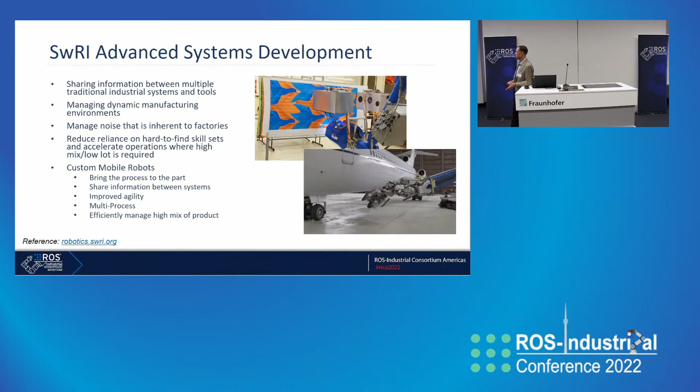So a little bit of background on us. We work a lot in applied R&D across a large spectrum of disciplines in engineering, everything from deep sea to deep space, as we say, which also includes robotics. So in terms of the types of robotic systems that we work on, we're really focused on trying to deploy robotic systems in places where traditionally it's been really difficult. So for us, this is primarily trying to work in dynamic manufacturing environments where we can't fixture parts or parts don't come out the same way every time.

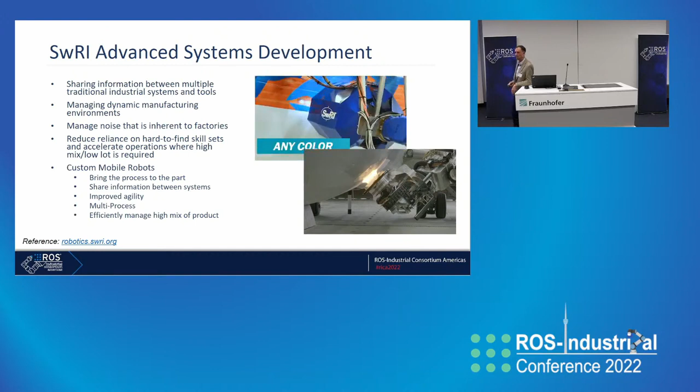And that there's some element of a dynamic environment involved. And also trying to deploy robotics for places where it's also difficult to hire people with hard to find skill sets, as well as trying to deploy robotics for dangerous or dirty environments. So those are sort of our focus areas, and so we do a lot of work there. And also building custom robotic systems, whether they're large mobile robots or sort of non-standard robotic systems that leverage manipulators and other external axes and things like that.

So briefly this. We're involved in ROS and ROS Industrial because we've had sort of all the same challenges as most of you have probably also had, right? Where there's a lack of interoperability, where we're having to rewrite software for robots all the time, where we're trying to work in environments where it's difficult for traditional robots to exist. And so that's what's really gotten us involved in ROS and ROS Industrial in the past.

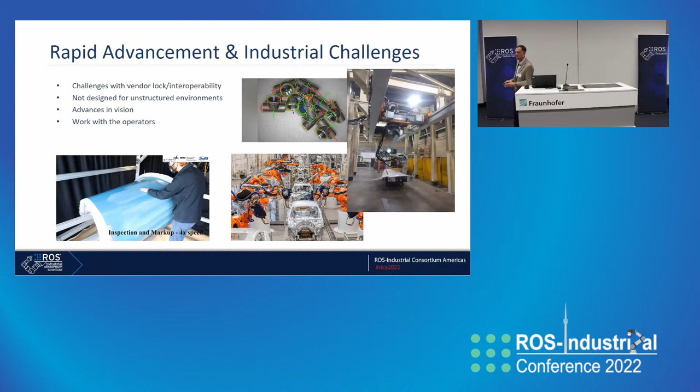And so we're trying to leverage all the cool capability, advances in perception and motion planning and all those sort of things, and trying to bring those together into robotic systems that can do things that they've never done before. So that's sort of our organization at a really high level.

So over in the America side, we do a lot of work on surface processing with robotics. And a lot of our applications fall into the sort of paradigm that we call scan and plan. So the idea there is that we want to be able to present a part to the robot that it's never seen before and have it be able to do some sort of meaningful task, usually some sort of surface processing like sanding or painting or grinding or inspection on this particular part, and have it be able to handle variances in parts, have it handle variances in the environment.

And then from there, infer how are we going to do this process, whether it's sanding or painting, come up with that sort of logic and do the motion planning and then have it execute autonomously. And so we do a lot of work on all the various pieces that go into this process, as well as sort of the application level of this.

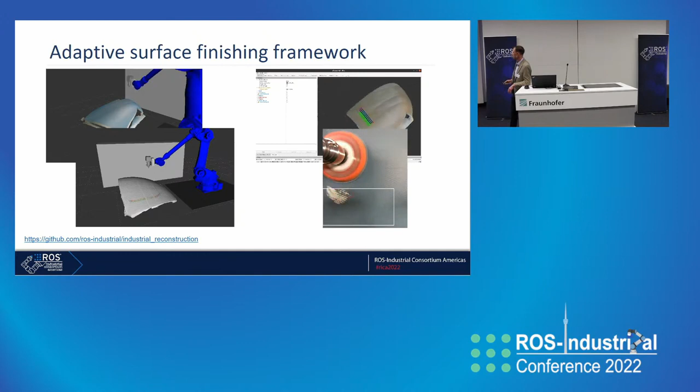So over the years, we've developed different scan and plan applications, mostly in ROS-I. We've taken that same pipeline, all those tools, and updated them and turned them into this ROS-II incarnation that we're calling the scan and plan workshop. We initially presented this as a workshop at ROS World in 2021.

That was with the hardware setup shown on the left here, a big Motoman robot and PushCorp end effector doing a polishing operation on an aircraft part. And then we took that framework, added some new capabilities and refined it a little bit, and then created this demo that we presented at Automate this year in Detroit over the summer.

And so this is a video of our consortium lead, Matt Robinson, running the system here. Again, the idea is similar. We have a RealSense on the end of this robot. We've got these arbitrary different parts that are traditionally pretty hard to do a surface reconstruction of because they're really bright and really specular.

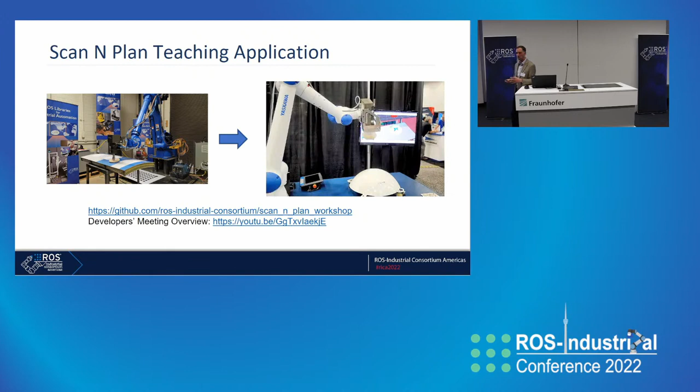So using our updated surface reconstruction tools to come up with a model of this, and then giving the operator the ability to select on that model, saying I want you to go do some sort of surface finishing task, in this case polishing on that particular area, and integrating all this into a standalone application.

And so our GitHub link is down there at the bottom as well, and all this code is open source. The idea on our side is that a lot of our consortium members are really interested in these scan and plan applications. So we wanted to put this together as an example we could use in training and other applications, as a template repository for people trying to develop scan and plan applications. Definitely go check that out if this is something you're interested in.

We also did a developers meeting about the inner workings there, it's linked on there as well. But we've made a lot of improvements to the various parts of the scan and plan application, so I want to touch a little bit more on what those are.

So the very first piece here is surface reconstruction. Like I mentioned, this can be really difficult for really bright, shiny and specular parts. So we've done a lot of work creating a new pipeline for surface reconstruction, and we put this together in a repository we're calling Industrial Reconstruction. It leverages some tools from Open3D - basically streams of depth images and color images are piped into the system with TF transform updates, and the result is you get a semi-live surface reconstruction that's fully colorized and does a really great job on specular parts.

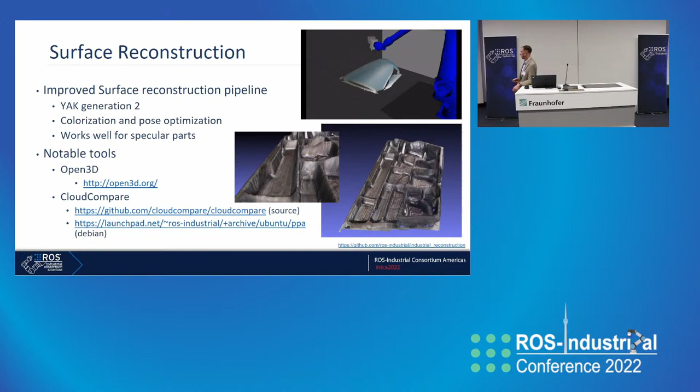We've re-architected this into a more customizable toolpath planning solution. Our idea is a pipeline for motion planning where first we make modifications to our input mesh, whether smoothing, segmentation, or region selection. That goes into the mesh modification. We take the output meshes and generate toolpaths on them, using several different planner implementations like raster planners and edge planners to produce toolpaths. Afterwards, we have a step to modify those toolpaths, maybe doing orientation smoothing or flipping the direction. So these are all interfaces for our toolpath planning library, and it's also plugin based.

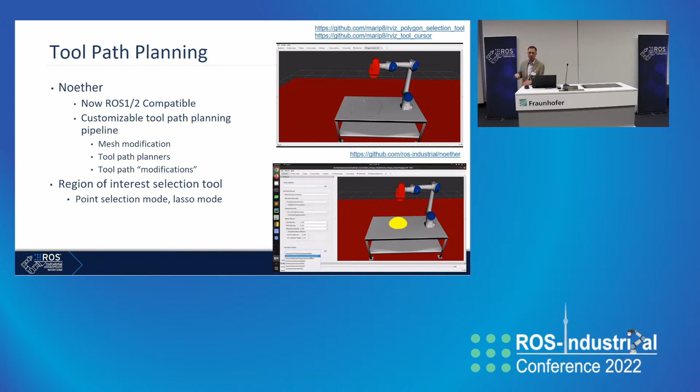We also did some work on improving our region of interest selection tool, shown in the video up top. A lot of our systems use a high-level operator interface to let the operator say, 'I want to do some task in this general area.' We've been using this tool for operators in the RViz environment to select regions of interest they want to work on. That's coupled with the toolpath planner as well, by being able to extract sections of a mesh given that definition. Some cool improvements there.

I'll come back to that slide in a second. We also do a lot of work on Tesseract, our motion planning environment. For those unfamiliar, it's similar to MoveIt but geared more towards the industrial applications we encounter. Some differentiating features of Tesseract versus MoveIt are that it's cross-platform and ROS independent, making it easier to deploy on different operating systems.

We've also done a lot of work on collision checking, developing different plugins to optimize how that's done and the amount of time it takes for motion plans. The environment is also set up to be fully mutable, so you can fully change or build up an environment dynamically. For example, if you wanted to do a tool change for a robot, it's easy to cut off a section of the robot's links and move them to a different joint, or introduce something new into the environment.

But probably the coolest and most interesting aspect of Tesseract is the motion planning pipeline we've set up. We tend to do a lot of what I call multimodal motion planning - leveraging different types of planners to come up with a nice hybrid plan. That might mean running OMPL to come up with a free space plan, then using TrajOpt to optimize and produce a better, more optimal trajectory in terms of smoothness and jerk.

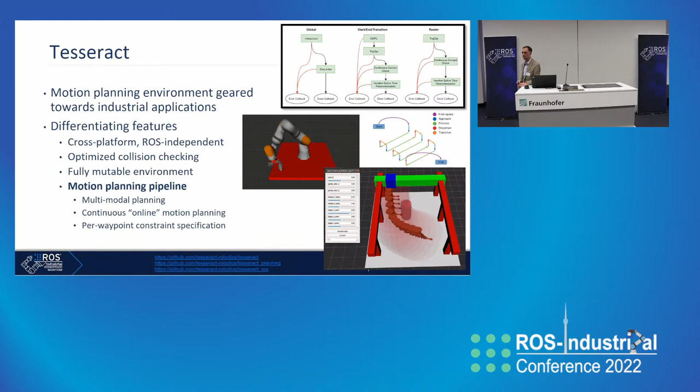So that's what we're showing on the graphic on the top right: we have the ability to create really custom motion planning profiles and paths to tailor it to the application. That's been a big game changer for us in making nice motions customized to some of the applications we're seeing here.

We've also made quite a few updates to our Descartes motion planner. For those not familiar, this motion planner is really good for under-constrained Cartesian waypoints. So if you have something like a raster pattern for surface coverage, and an application that doesn't use the full degrees of freedom of your system—say you have freedom about the tool z-axis and a 6, 7, 8, or 10 DOF robot—you have to do kinematic redundancy resolution. Descartes is a tool we use to do this, to come up with more optimal trajectories.

Recently we've been using this again in that multimodal planning paradigm, where we use Descartes to come up with a quick solution that we know isn't optimal, but use that as a seed trajectory for TrajOpt or an optimizing motion planner to make it a lot better.

Some updates we've added: it's cross-platform and ROS independent. We've reintroduced our own dynamic programming algorithm that searches this graph to come up with a solution, but we've also reintroduced a lot of traditional search algorithms from the Boost Graph Library, expanding some of the capabilities we have there.

Branching out a little from the scan-and-plan tools and applications we've been developing, we also have a variety of other projects we're contributing to. I'll breeze through these quickly in the interest of time.

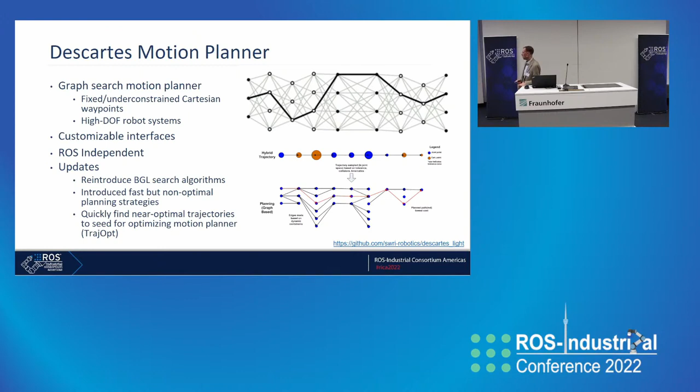We've also been doing a little work on the assembly side of things. This is a project by the National Institute of Standards and Technology in the United States. Essentially we're trying to develop a framework for different assembly tasks—not necessarily working on the tasks themselves, but piecing together a framework to allow different users to focus on those tasks and integrate them with hardware quickly, without having to spend a ton of time on boilerplate application code.

We've also been doing a little work with the open additive manufacturing framework, trying to plug in some of our motion planning tools to come up with trajectories that are good for additive manufacturing. We did some work in our labs here trying additive manufacturing using a weld torch—some interesting work going on there.

We're also very involved in the ARM Institute in the United States, working on a number of projects there. An interesting one is this project where we're essentially trying to take a planned trajectory and optimize the motion primitives so we can keep the trajectory as accurate as possible while also respecting the velocity constraints for that particular trajectory.

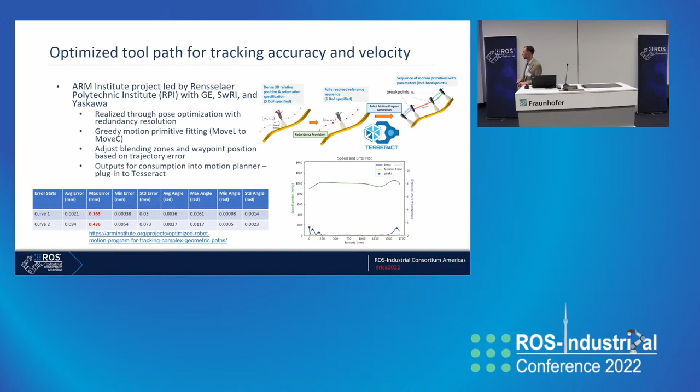Generally there's a trade-off when executing a trajectory between speed and path accuracy. So we're trying to figure out how to break up a trajectory into motion primitives that keeps it as optimal as possible where both of those things are concerned.

We've also been doing a bit of work on what I call meta planning. For some of our planning solutions for raster patterns, if not all the points are reachable, the entire plan just fails. So we've been working on an internal project at SwRI to come up with a meta planning framework that gives rules to handle exceptions when waypoints aren't reachable, and to take advantage of different kinematic setups or tool setups.

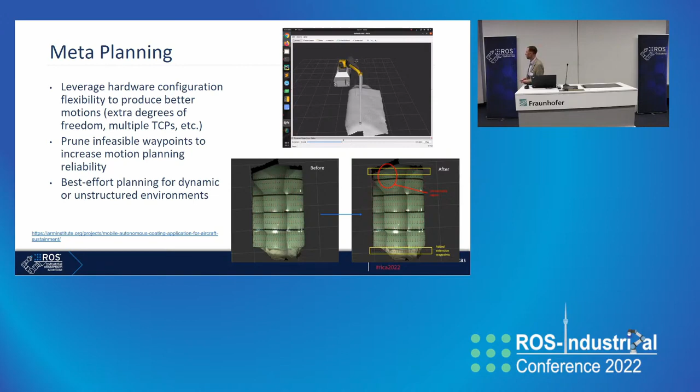In addition, we're spinning up an internal research project to tackle coordinated motion in a better way, one that's free of infrastructure changes. A lot of our past work has required infrastructure changes to support coordinated motion, like using indoor GPS or AR tags or other things like that.

We've gotten a lot of feedback from customers and end users that that's not really a feasible way of doing coordinated motion. So we're trying to spin up a project to investigate ways of doing this without having to modify infrastructure in facilities, really leveraging the full capability of a mobile system with a robot mounted on top. I think we'll be contributing back to a number of projects, and hopefully we'll be able to share great results from this project in the coming months.

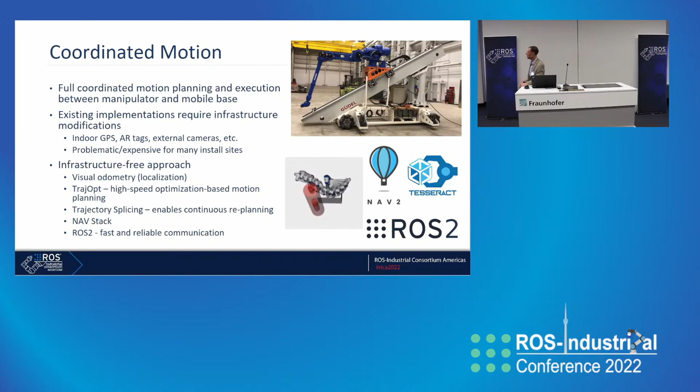The last thing I want to touch on, which we talked about a little earlier today, is trying to come up with an environment where we can use a lot of these ROS-Industrial tools in a CAD environment, with a user interface that's a lot easier to use. We've spun up this project internally at Southwest Research that we're calling SWORD to tackle a lot of these problems. The current tool we've built is a plug-in to the FreeCAD system.

We're trying to target capabilities we discussed earlier, like importing geometry of your robot in a CAD format, being able to build up a URDF visually, modify it, and generate collision shapes using convex hulls and convex decomposition. We're trying to integrate all these different tools into one place where we can use them.

We're also extending that to the whole scan and plan framework, being able to import parts, generate tool paths on the parts themselves, and have the motion planning environment exist inside this system as well, so you can really tune how the motion planning works and get a feel for the parameters and planning setups needed for a particular application.

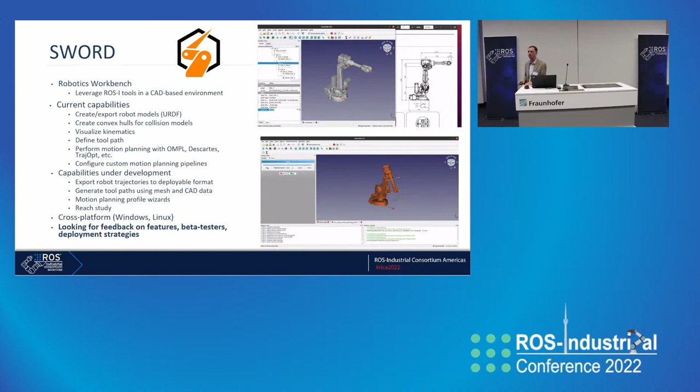We're getting really close to a beta release for this. So if this is of interest to any of you, please let us know. We'd be happy to get feedback on this and let you kick the tires on this particular piece of software.

To wrap up, some common themes across all the work we're doing here: there's really a need for improved compatibility and a lower barrier to entry for a lot of our tools. That's something we're going to focus on in the next year, making things available in both ROS 1 and ROS 2, and looking at cross-platform support so we can use these tools on Windows and Linux, broadening their availability to everybody who wants to use them.

In terms of lowering the barrier to entry, we're also trying to distribute a lot of these tools via the ROS build farm, making Python bindings to make them easier to use, providing more documentation, and creating what we're calling snackable content, like short videos that show how things work, as well as continuing to improve the capabilities we have.